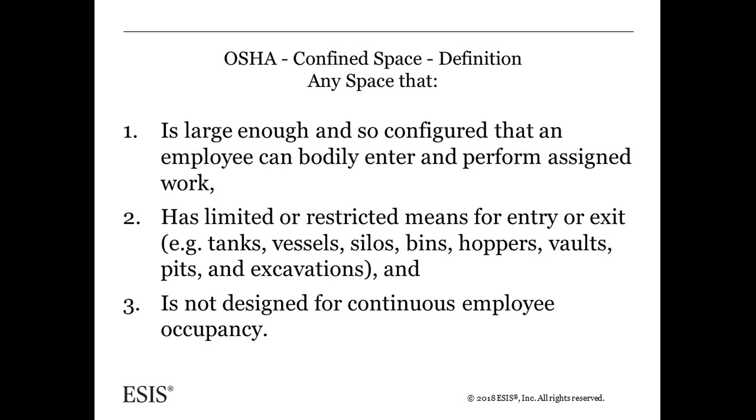How many in here are health and safety professionals? How many of you are responsible for health and safety of your employees? I think everybody should raise their hand that we're responsible for the health and safety of our employees, because we need to think that. We need to not allow people to get injured in the workplace, whether or not that's our profession or we're involved in those activities. That management commitment we heard earlier, this is very important as well in our regards.

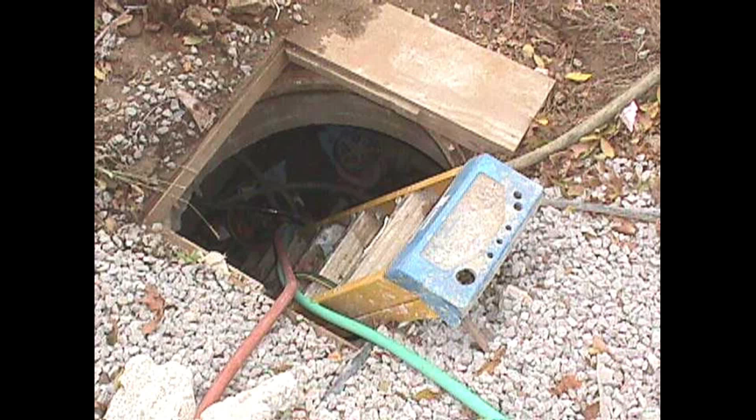Here's another example. Just because we may not be creating a hazard or have atmospheric hazards we're going to go through, we may have other avenues or other issues that create hazards. So these are just some examples. We may be introducing the hazards, like in this case. So we've got to be aware that we may not have a hazard as we're physically going to go into the space, but we may be creating them. And that most often occurs when we're doing maintenance and repair activities on tank cars or other railroad vehicles.

So once we know we've got a confined space, we've got to ask, is it a permit-required confined space? To know if it's a permit-required confined space, we've got to think to ourselves, is there a hazard, or are we creating a hazard by the activities that we're going to be doing on this particular maintenance activity?

So does it have a hazardous atmosphere or contain the potential for one? Are we going to be coating the cars? Are we going to be entering into the cars to muck them out, to get rid of whatever residue was left in there? What are we using to muck out the tanks? Are we going to steam the tank cars? Are we going to use the old diesel fuel trick to clean the crude oil out of a tank car before we go into them?

Diesel has been used for many years and is still used today, but there are a lot of different alternatives that we could be using instead of diesel fuel. So we've got to consider, are we creating a hazardous atmosphere or do we have one? Most of us aren't going to have issues with engulfment or internal configuration. Those are more for when we deal with full tank cars or full vessels. And then the fourth one is other hazards.

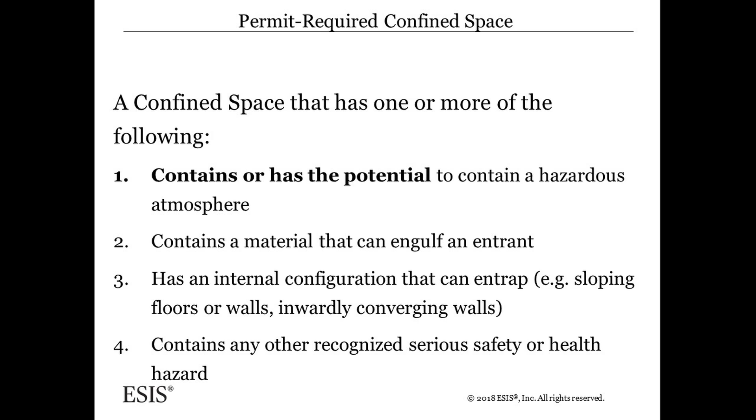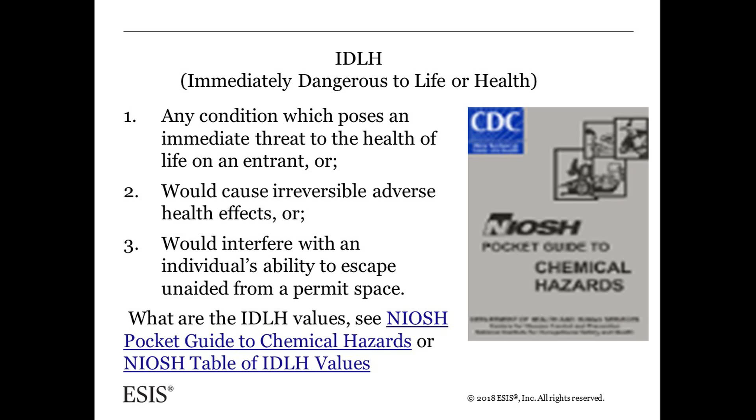And the last one is IDLH atmospheres. Are we creating them? What are they? This is just a link to how we find out. Most safety data sheets will not show this, so we need to be aware that we may be creating a hazardous atmosphere by what we're doing. We're going into a tank car, we're coating it, we're painting it, we're cleaning it, we're creating a hazardous atmosphere. And there are a lot of requirements to consider if we create IDLH atmospheres.

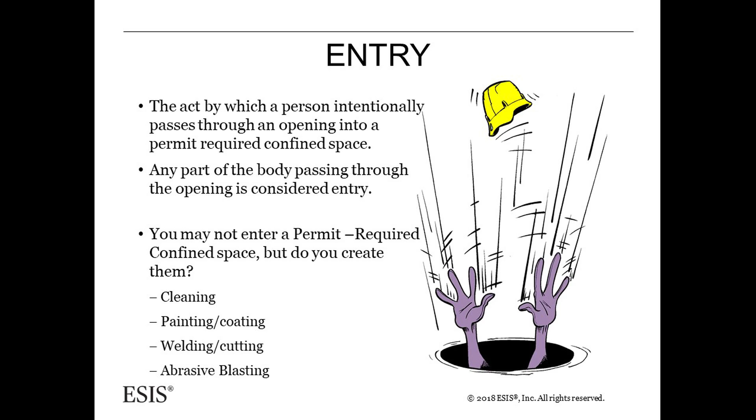Once we have a confined space, we've got to be aware that any physical body part, arms, legs, heads, anything that breaks the plane of the opening is considered entry. So if we're doing any work with any vessels or tank cars, we need to be aware that just by physically going into them, we've crossed the plane and therefore have entered into that space. And that starts triggering all the elements of the program requirements.

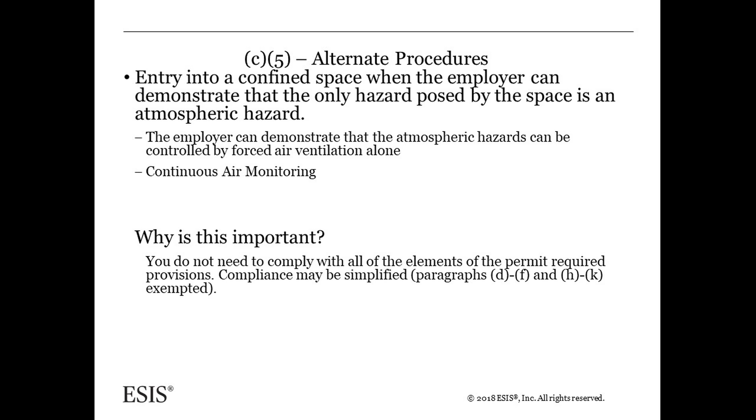The next way is if we don't have an atmospheric hazard, but there's other hazards present, how are we effectively eliminating those? Are we performing lockout, tagout? Are we ensuring that no material is in that tank? Are we eliminating those hazards prior to going into it? It's called reclassifying the permit-required confined space, because we're going into it and we've eliminated those hazards.

And again, it's important because you don't have to comply with all the requirements of the confined space entry standard. And one of those big things that's very hard to comply with for companies is the rescue provisions. How are we rescuing entrants that go into the spaces?

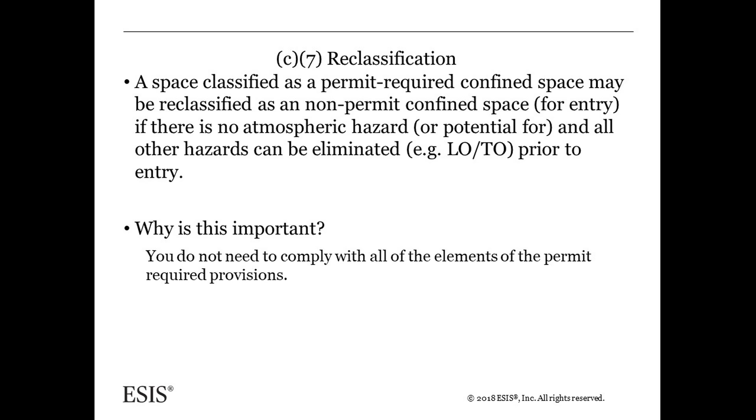Do we have the correct meters? Do we know what we're doing? Diesel fuel is a particularly interesting one because it's quite often used, and the standard combustible gas indicator, or LEL meter, will not work or respond correctly with diesel fuel.

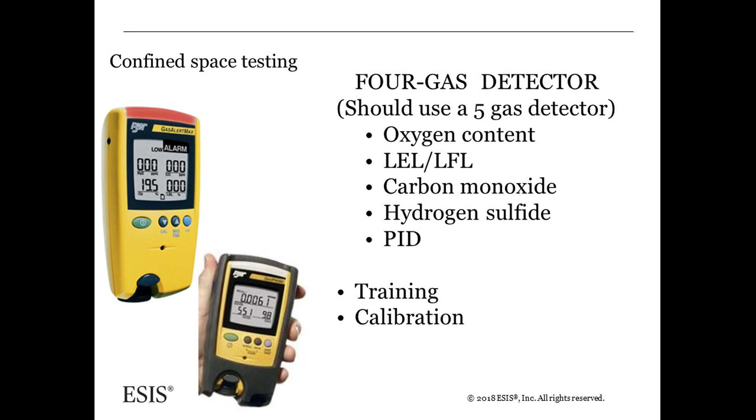There are specific other instruments, photoionization detectors, and other things that are recommended by the equipment manufacturers if we're dealing with diesel fuel. So we need to be aware and ask the questions to the vendors, to your safety professional, to whoever it is: do we have the right instrumentation for what we're dealing with?

And the other thing we've got to consider is, are we sampling in the right locations? This is a better scenario. This is from an OSHA Susan Harwood grant that just kind of goes through testing locations of a tank car. Are we going to test in all those locations? Probably not. But it goes to point out that you can't just test one location.

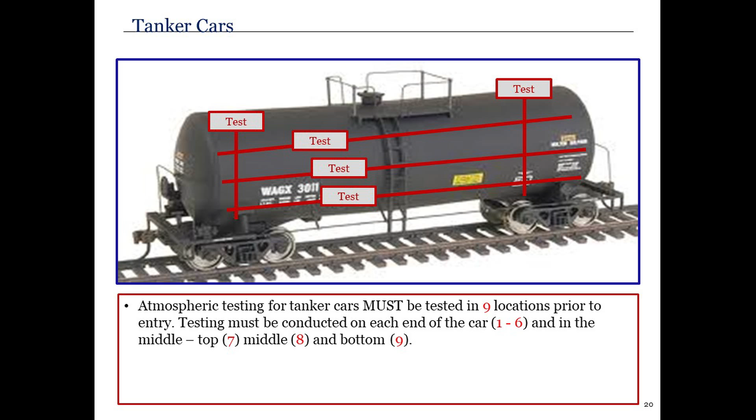That one location, is it representative of all areas of the tank we're going into? We've got to think in terms of where we can have trapped gases, trapped vapors, whatever it might be that create hazards to us.

There's many different manufacturers out there. We don't recommend any one. I do have favorites. This particular manufacturer, RAE Systems, has technical notes that will help you or your facilities in developing and ensuring you've got the right instrumentation for what you're dealing with.

One of the things that's new technology, I haven't seen it used in the rail industry yet, but in some of the aerospace industries where they go into the fuel tanks of engines or the fuel tanks in the wings of the C-5 Galaxies, they'll actually have heart rate monitors with chest straps that monitor the heart rate, and they'll have the meter that they're wearing, and all that stuff feeds real time

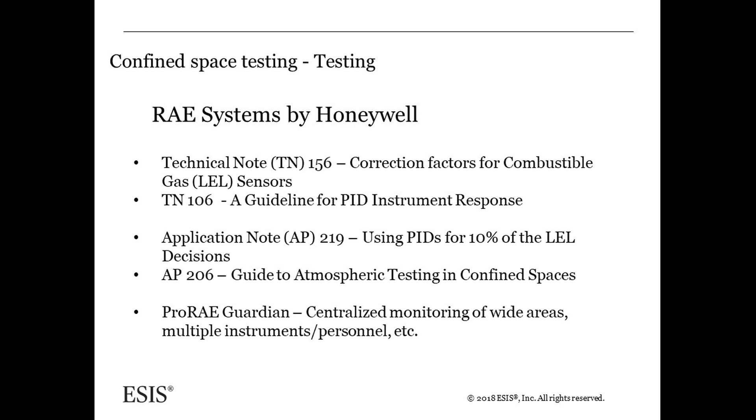into a computer so people will be able to dispatch an emergency response team if a man or woman goes down, whoever is wearing that particular equipment. So there's a lot of new technology out there that, as we go forward, we can start thinking of as we're updating our facilities.

Forced air ventilation. When we talk about forced air ventilation, it's bringing fresh air into the tank when we're doing work. It can't create an additional hazard. Driving down the road, you'll see AT&T or one of the road crews. They set up their guardrail around that manhole, and they've got that little fan blowing into the space,

and it's at a traffic light. And I think to myself, do they not realize that a car is idling right there, and you're just sucking all that car exhaust right into the space, creating an additional hazard? So we've got to think about where we're placing that and what type of air we're bringing into the space. In the shipyards, they actually have requirements for the fresh air supply into those particular barges or vessels.

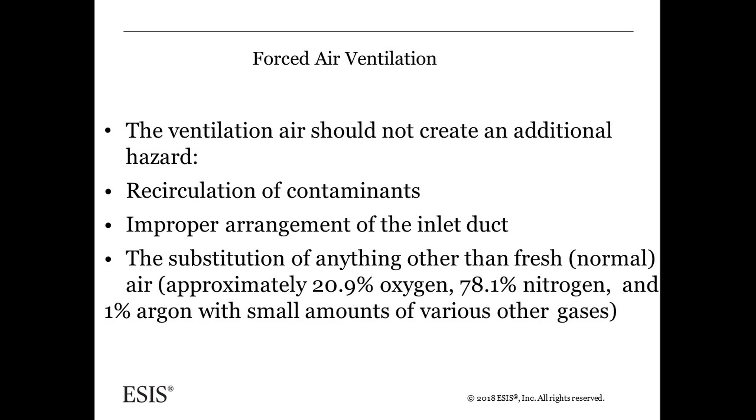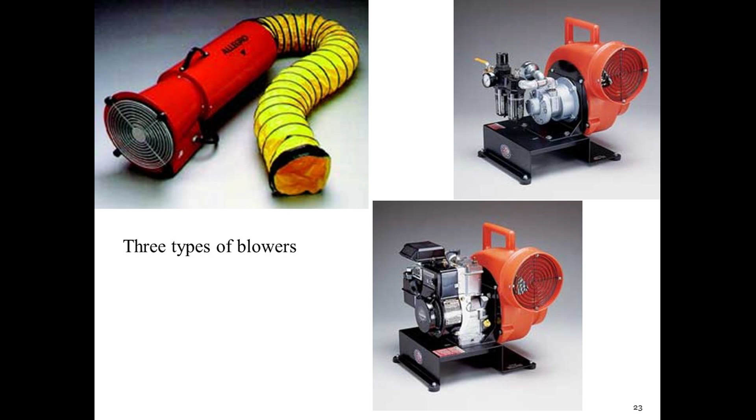Here's just some different types of examples of different units. One thing we've got to be aware of is if it's a hazardous atmosphere and there's potential for flame or flammable parts, we've got to have intrinsically safe or explosion-proof equipment. So we don't want to create a hazard. We want to eliminate the hazard. There are specific requirements out there that we can talk about if you're interested.

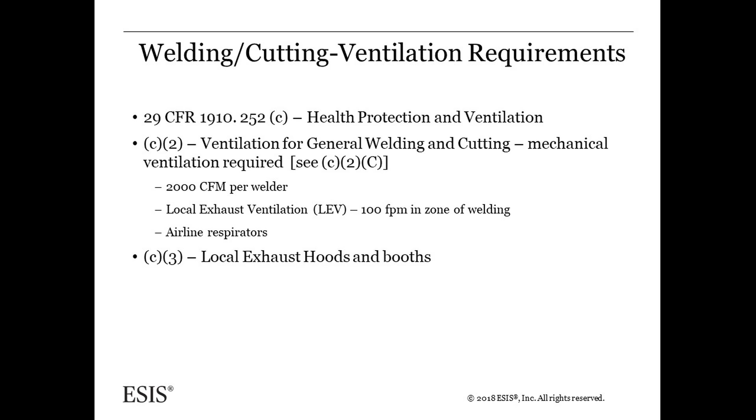One of the things that we see quite often is health protection and ventilation for confined spaces when we're welding. Are we adequately protecting our people as we're going into the tank and doing repairs, doing welding activities? I wasn't here for the welding. I don't know what was covered in that, maybe quality, but one key aspect of confined space entry is appropriate requirements for welding and cutting in confined spaces.

And when we look at this, we also have to know what we're welding on. We're not talking about all the different hazards, but we have to know if we're welding on stainless steel, carbon steel, mild steel, what type of welding techniques we're doing. All these things matter when we're dealing with confined spaces.

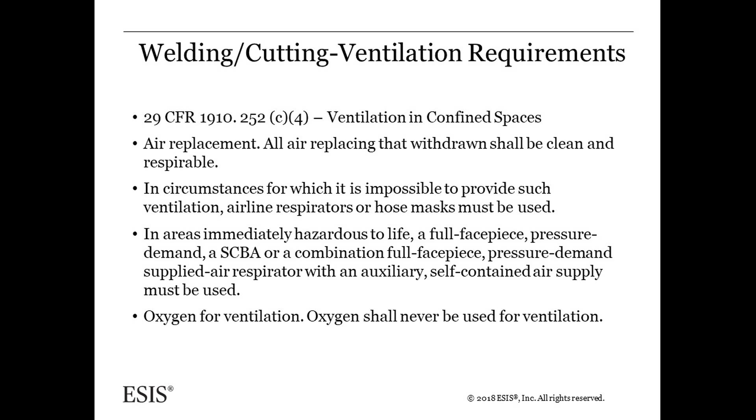We always talk about the hierarchy of controls when we deal with confined spaces. We want to eliminate the hazard first, substitute it if possible. When we're dealing with cleaning, mucking out tanks, diesel fuel was mentioned as commonly used. I'm sure there are vendors here at this conference that will have products that are used as alternatives to diesel fuel. They actually have chemicals now that you can put into a confined space that will take that hazardous atmosphere or flammability part and eliminate that as the hazard. It'll convert it chemically to a non-flammable atmosphere.

Engineering controls, administrative controls, and then PPE is always the last resort. And that's because we're humans and we fail. We don't wear it right. We don't want to wear it. It's too hot. It's too cold when we start blowing in air. So all these things matter when we're trying to control atmospheres, and that's why PPE is always the last resort.

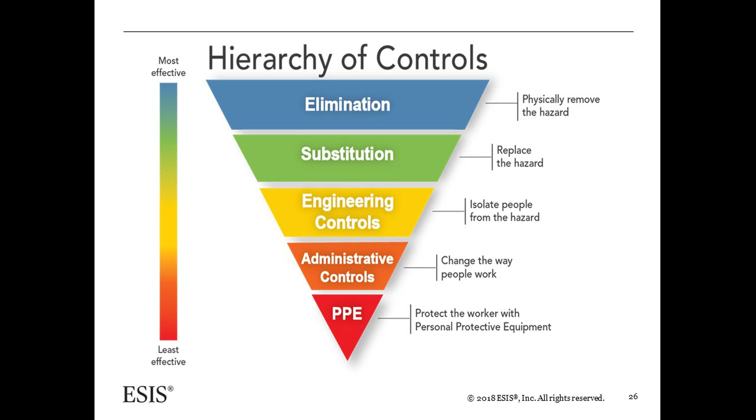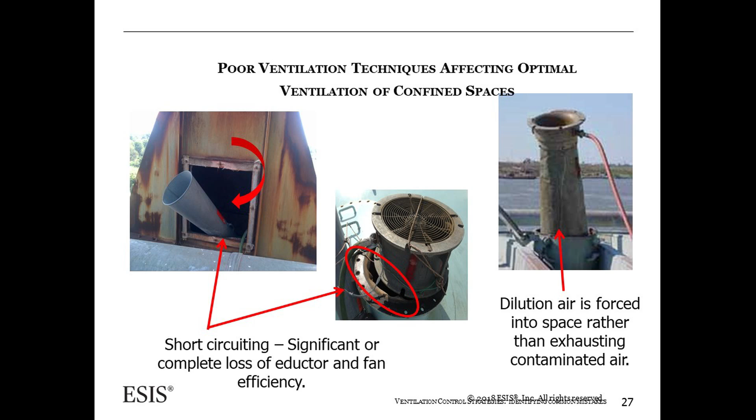More examples. Poor ventilation. At least we're ventilating it, but a lot of that air that's being brought in is right at that opening and getting sucked right out. It's not ventilating the space, it's just being sucked out right at the opening, not where we're doing the activities.

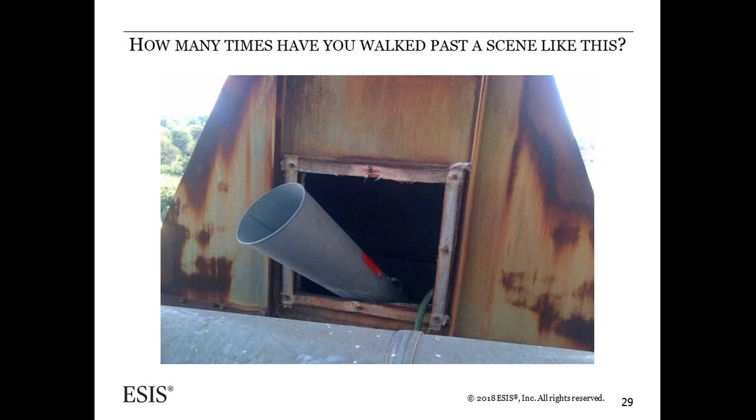And then the last thing we're going to talk about is rescue. One of the things that I see as a big challenge in railcar maintenance activities is rescue provisions. If we're at a plant, it's usually a lot easier because we can train our staff, we can train our emergency response team, we can do certain things for self-rescue, non-entry rescue, or entry rescue in the plants. But when we're out in the middle of a field, if for some reason you've got to go into a rail car, there may be a lot of limitations to rescue provisions.

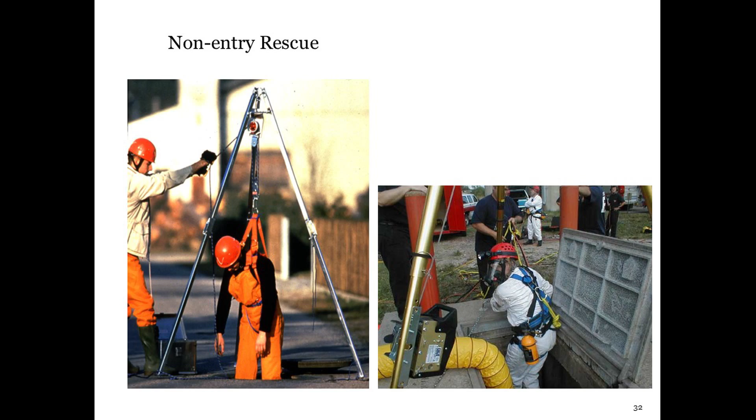This is self-rescue itself. You just recognize a hazard, your alarm goes off on your meter, and you get out. Non-entry rescue: there are many different styles of equipment available for non-entry rescue in confined spaces. This is just a tripod and winch system. You have davit systems. These are new tech, they're advancing all the time out there in industry. There are many different styles of this. Those are all considered non-entry rescue.

We need to consider those in the rail maintenance industry because this eliminates the need for someone to go into the space and create an additional hazard. You've all seen stories on the news of would-be rescuers that are fatally injured as well. Because even though we've been trained not to go in, it's my buddy, something happened, and I go in and try to rescue them. And then I become a victim as well.

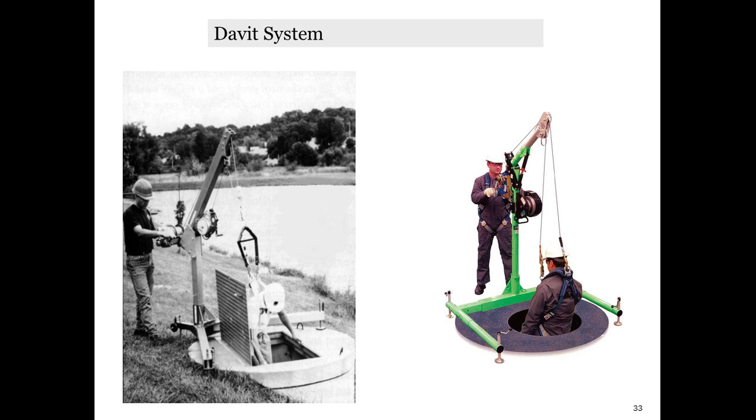So non-entry is preferred. Entry rescue, there's a lot of things we need to be aware of for entry rescue. A lot of plants that we go to, or a lot of facilities in different industries, will decide they want to utilize the local fire department or the local emergency services, whoever that might be. Well, they may be out on a call somewhere and not available for the need of an emergency. They may be 10 miles away, and if they have to respond to your plant, it takes 10 minutes to get through your plant to get to where that location is. Is that 10, 15, 20 minutes? What's going to happen to the person if they're in that space?

We've got to think that the local emergency services may not be capable of providing rescue for confined spaces. If you do rely on those, or your company does, you need to make prior arrangements and know that they can physically go in and enter those spaces. A lot of fire departments aren't trained in it, especially in the small communities when we have volunteer services versus a full-time rescue service.

So here's some best practices. Consider, I saw earlier some people here at the conference that have robotic spraying applications, abrasive blasting applications, robotic. They cost money, but as we're looking forward to the future, we can eliminate the entry into these if we start to consider robotic applications. Automated systems for cleaning rail cars, there's a lot of them out there. We don't have to go into the tank car necessarily. We can muck it out without going into it by using these automated systems, using a different chemical as an alternative, substituting abrasive blast media.

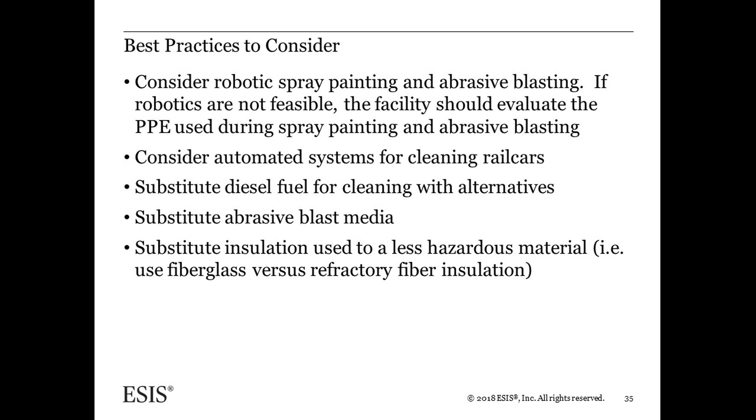One of the big things we see today in the health and safety world, because OSHA passed the standard, is silica. If we're using sand to do abrasive blasting, we've got to get out of that. Sand shouldn't be used anymore. There's too many alternatives that can be used in place of that. And then substitution. I put it in there for this particular application, because we can work with the Railroad Administration or the engineers that do the specifications. We've got to consider fiberglass versus the refractory ceramic fiber blankets. We've got to work with the regulators so that we can substitute a less hazardous material for insulation of rail cars.

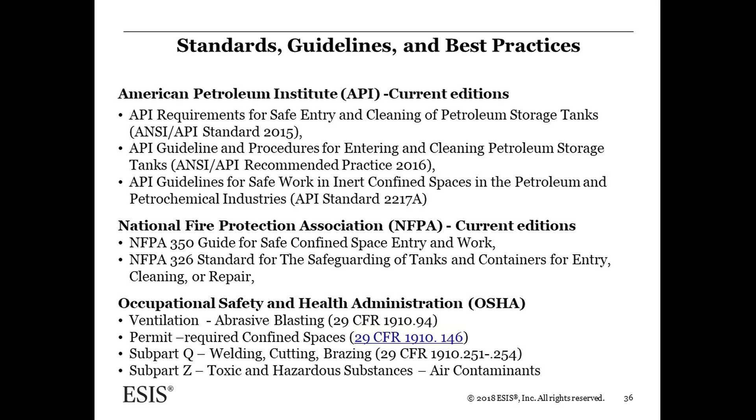And here's just some standards, guidelines, best practices. American Petroleum Institute has several confined space entry documents. A lot of these deal with bigger tanks, but they can be applied in the rail car industry. NFPA standards, there's several of them out there dealing with confined space. Of course, all the OSHA requirements. If you ever have questions, make sure that you consult one of these books. Work with your insurance company, your safety professional, us, whoever it is. We're in this profession to protect the workers. And that's what we've got to get to, ensuring that we don't have confined spaces that injure people. A hazard, right?